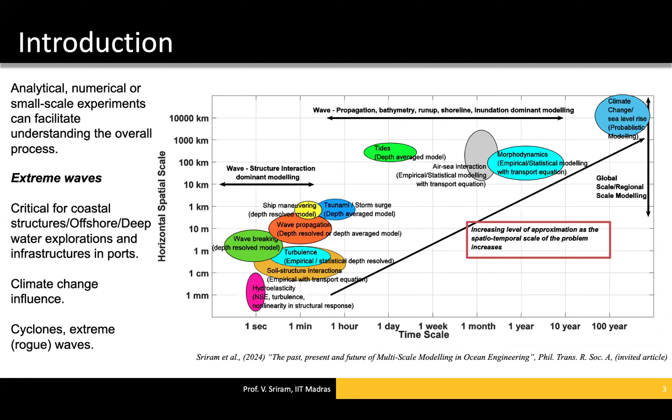So, one of the aspects is how do we model this entire scenario. So one way you can overcome this is to try to go for a large scale model, because we have two different scales, a large physical scale as well as the spatial scale and time scale model. So scale effects are going to play a role, particularly in coastal engineering.

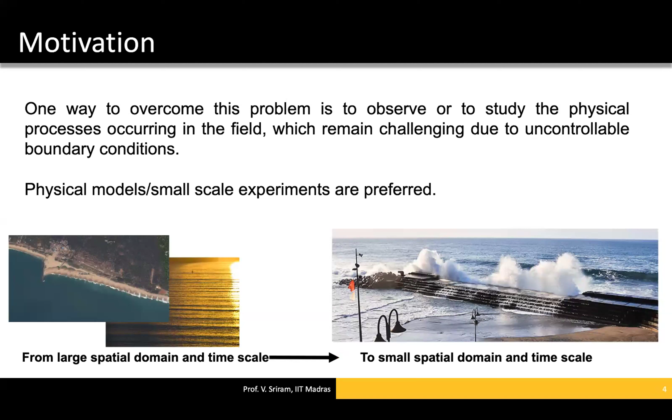So one way to address this entire scenario is by decreasing the error. If you look at it, for example, the scale effects, particularly this particular scale effects, you have different types of scale effects.

That is, the forces that we have to satisfy are gravity, friction, elasticity, and surface tension. So in order to satisfy each of these effects, you have to follow a modeling law. If you look at 1:1 scale, this entire scenario will be satisfied.

But if you go to a smaller scale, or if you try to do it at a different scale, obviously there is going to be scale effects that come into the picture. So to address this particular problem, people have gone for large scale testing facilities in the world.

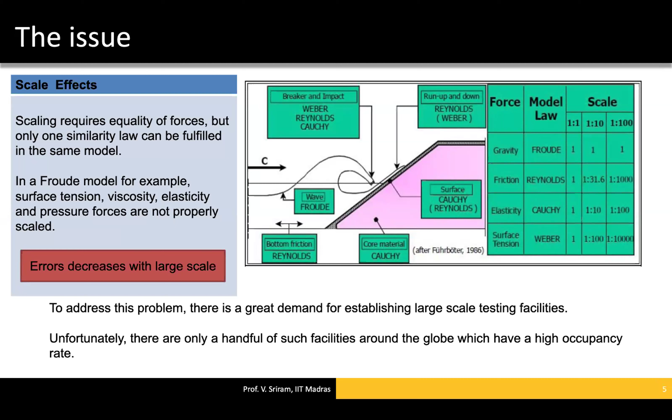So if you look at it, these large scale facilities, there are only a handful of large scale facilities available, particularly for coastal engineering. What we are talking about right now is a 1:1 scale with a water depth of 5 meters.

If anything can be done in the field at 5 meters, we can reproduce the same at 5 meter depth. If you do it for a different water depth, you will have a different scale effect. But up to 5 meters, you can actually do it at the same scale. So that was the overall idea.

If you look at it, there are different facilities that have been built, from GWK Plus and the new Delta Flume. All of them can handle a very high water depth, and we can generate at a 1:1 scale. So as part of this center, we proposed a 500-meter long flume that is under plan right now. We got the space and we are trying to build this particular facility, which will be part of this entire center.

So we are going to have this particular large scale facility in India. This is going to be one of its kind in India, and we are going to have this facility in the Discovery campus, which is about 40 kilometers from the present campus at IIT Madras. And we have two different scenarios: there is a C building and a D building. C is basically a port center, which was inaugurated last year. It is completely in operation right now.

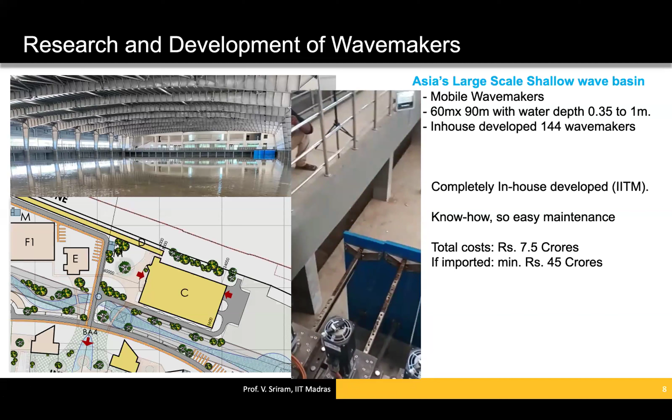This facility is completely in-house developed, and we have not imported any of the knowledge behind this particular facility. This is one of the key things, that we were able to create such a large facility at the campus. That is basically the deep part.

In parallel, we are also trying to build another facility as part of this shallow wave basin, an intermediate testing facility at 1:4 scale. This facility will be used for testing offshore wind, the floating sector, and breakwaters at a medium scale, basically mid-scale facilities. We have a stroke length of 4 meters that can generate wave periods from 3 to 6 seconds. We cannot do any maneuvering here, but we can do motion studies or seakeeping mostly.

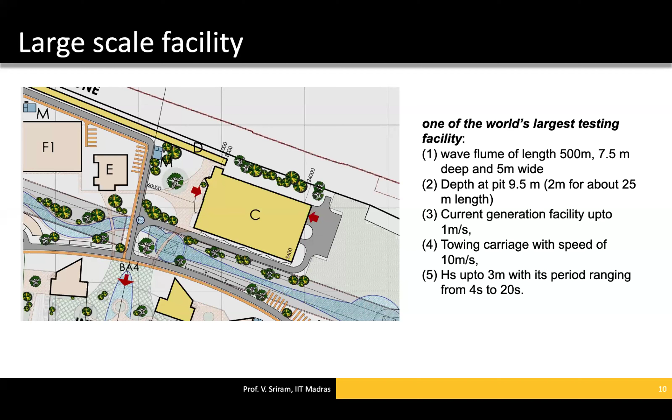And the final one: we have a vision of creating one of the largest testing facilities, with a stroke of about 8 meters. That is what we are planning right now, and it can create a significant wave height up to 3 meters, exactly 1:1 in prototype conditions, with periods from 4 seconds to 20 seconds. That means we have a very big paddle to push the entire water column of the wave.

So this is the testing facility we have in mind, and some of the key technology areas we try to address, using either this facility or our own expertise, are autonomous surface vehicles, renewable energies, and coastal engineering dynamics, particularly scour and bed evolution, as well as ecosystem-based solutions, basically wave-vegetation interaction, and we will also try to address inland waterways.

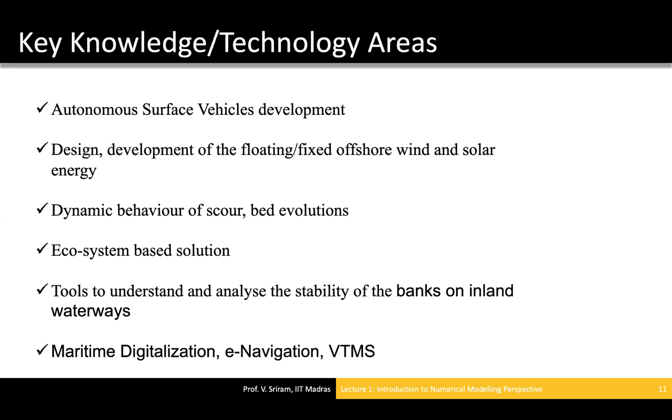Inland waterways are going to have a big boom in India right now. So we would like to develop a tool to stabilize the banks when inland waterway traffic takes place. And of course, we are also looking closely at vessel traffic management systems, e-navigation systems and maritime digitalization. These have already been put forth in some of the ports in India. And I will list out some of the research verticals that we will be working on in this center.

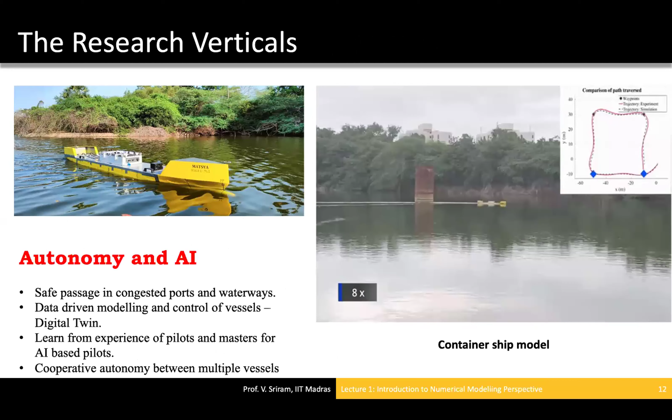In the next 15 minutes, I think Professor Abhilash will discuss more about this autonomy and AI. So this is one of the areas which we will try to look into, as well as the state-of-the-art numerical models which we have at present at IIT Madras.

We have our own in-depth, in-house developed numerical models, starting from a fully nonlinear potential flow solver to the Boussinesq model to the shallow water equation model, as well as WaveGen, as well as the simulator. Some of those are state-of-the-art numerical models which we have benchmarked with a lot of other codes internationally. And this is one of the highlights of this center, wherein we have a collaboration with a lot of people around the world, wherein we try to benchmark our code along with the rest of the world's code. So that means we have been in the field for some time.

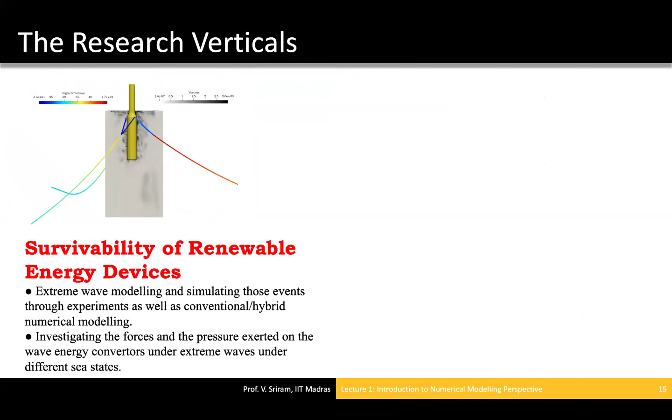Another research vertical which we are working on is the survivability of renewable energies. Yes, we can put a renewable energy device there, but particularly in India, if you put it in the Bay of Bengal or near Kanyakumari, there is the survival of those renewable energies, because we are facing some extreme climate scenarios. So how these wave energy devices will survive during those extreme climate scenarios is also one of the research areas. We are also working on AUV docking. Again, I think Professor Abhilash will look into this aspect in the next 15 minutes of talk.

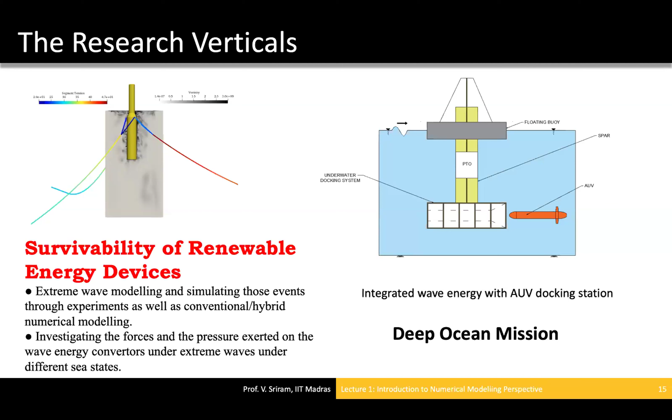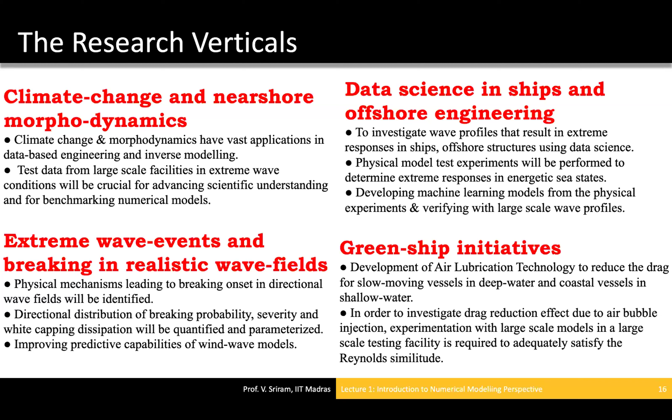And apart from these autonomous vehicles as well as autonomy, we are also looking into coastal engineering, particularly the extreme climate scenarios, nearshore morphodynamics, and data science in ships as well as in offshore engineering, as well as the green ship initiative, particularly the air lubrication system under the vessel in the inland waterways to try to reduce the drag. So that is also one of the parts which we are looking at as part of this center.

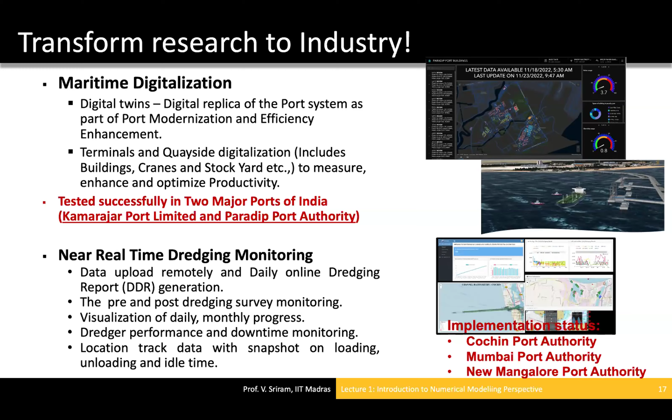Recently, we also transformed some of that research into industry. Particularly, through this center funding, we integrated the real-time dredging monitoring system, as well as maritime digital twins for some of the ports like Kamarajar Port and Paradip Port, which we have already implemented. And currently, we are also implementing these real-time dredge monitoring systems at some of the ports. So it means not only the research part, we also try to transfer this to industry.

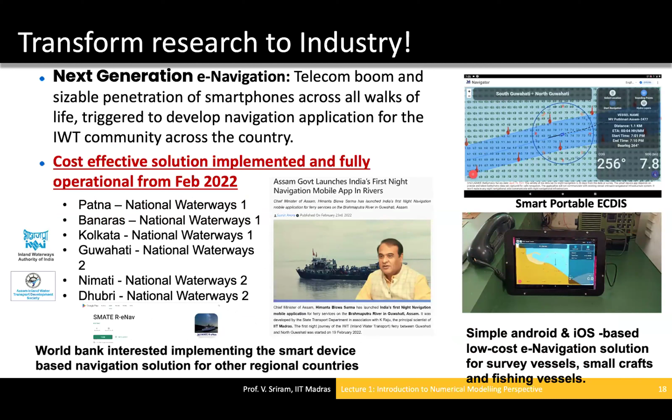The next aspect is we also developed an e-navigation system for the national waterways, which was implemented in the first phase of the center from SMATE. And this is also one of the things where we try to transfer whatever we do in research to the industry. So these are some of the collaborations which we have right now.

And we have a lot of JDP programs also. I see there are a lot of students over here. So we also have a joint doctoral degree program with some of these universities like University of Melbourne, NUS, Centrale, ECN, as well as RWTH Aachen, wherein we have a joint collaboration. That means the students get two PhDs, from IIT Madras as well as the partner university. So this is all overall about this center. Now we will continue, and I will leave it to Dr. Abhilash to continue on one particular topic of this research vertical from the entire center perspective. Yeah.

Okay, am I audible and is my screen visible? Yes. Okay, fantastic.

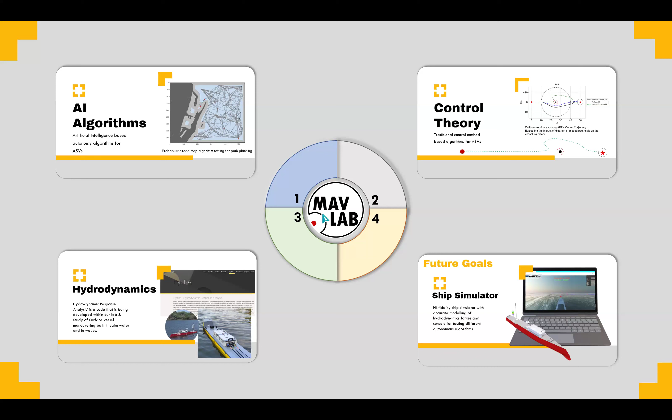So we use what are called deep reinforcement learning based controllers. And these are primarily based on how humans learn. When we learned how to walk, we actually failed multiple times. And over time, we got the reward of what works and what doesn't work, and we were able to put all of that together to finally learn how to walk. So ships are very similar.

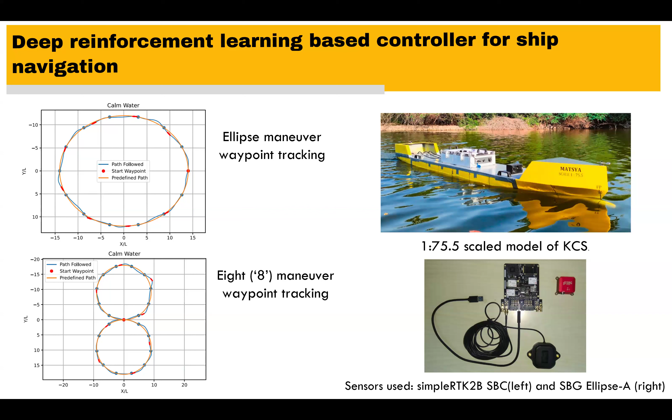Some of the sensors equipped for this sort of test would be the IMU and a GPS. These two would be fused together in order to localize the vehicle. So the vehicle takes both these measurements together to figure out where it is located at any particular time. And based on that, the deep reinforcement learning will guide it from one waypoint to the next. So we do implement these vehicles in the real world.

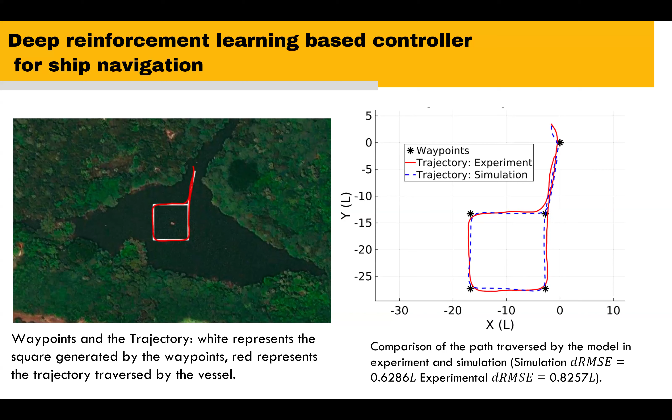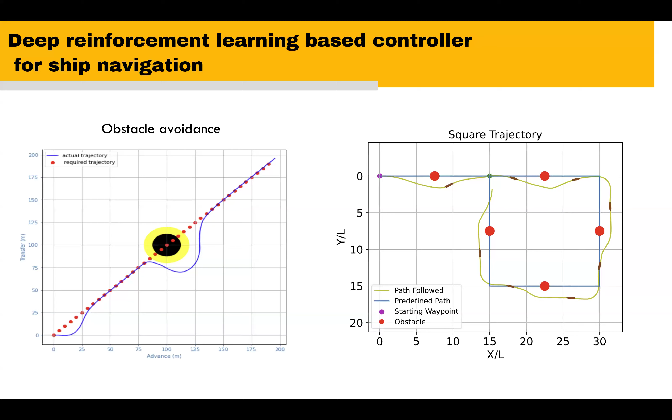So that completes a little bit of what we have talked about AI algorithms. So we'll now move on to the next part, where we'll discuss a little bit about traditional approaches for achieving the same objectives. And we are very interested in seeing how reinforcement learning and other paradigms can be combined with the traditional approaches to yield us the best of both worlds. So that's what we'll look at now.

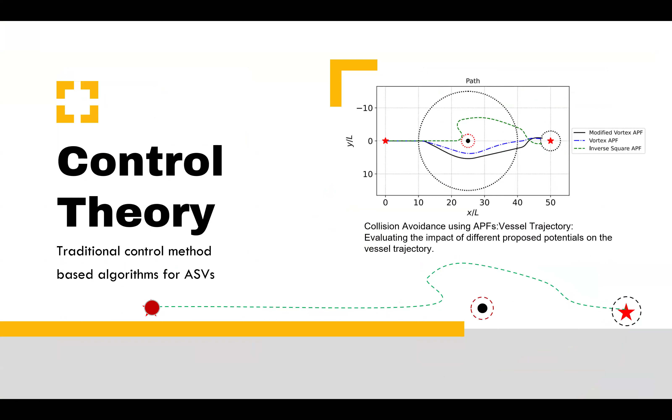So typically our ships are under-actuated, which means that these ships do not have actuators in all the degrees of freedom in which they need to work. So you can think of this like a car, where a car can move forward and can turn around, but it can't move sideways, because we do not have wheels which can make a car move sideways.

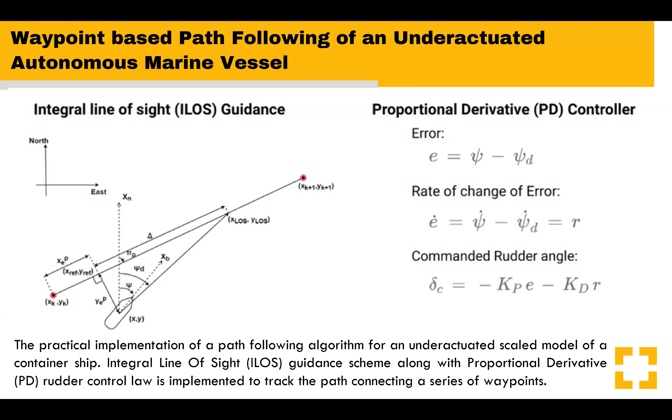Since it is under-actuated, we have to rely on these systems, and we have to actually prove that they are stable in all situations. And there is a lot of mathematics which we are not including in these slides, as this is a general public audience talk. But obviously, when we want to actually implement them, we have to dig into the math. So once all of that is done, the result is what you see here.

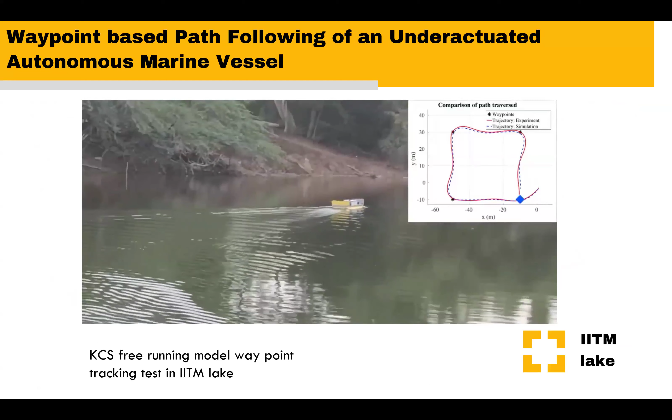So here we have our Matsya ASV, or autonomous surface vehicle, which is tasked with following a square trajectory. You see those 4 points on the plot on the top right. As it tracks each waypoint, the waypoint turns blue, indicating that particular waypoint has been tracked. And this is using ILOS guidance, or integral line of sight guidance, coupled with a proportional derivative control to control the rudder.